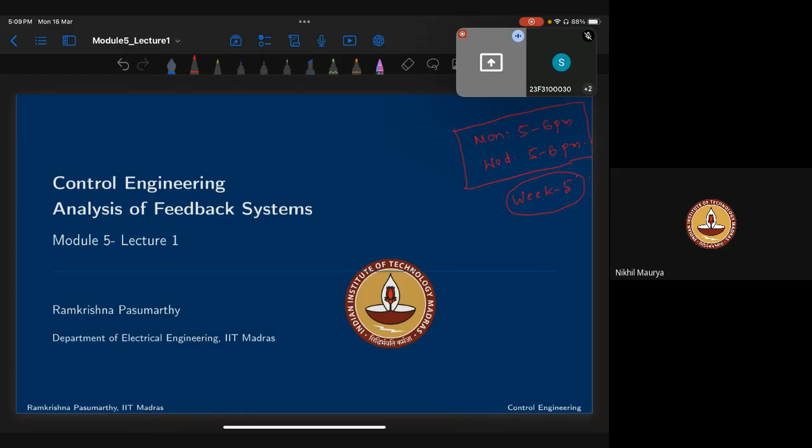So in today's live session, this week, that is week 5 of the course, what I'll do is review the course material today, and coming Wednesday's live session I'll do the problem session. So whatever doubts you have in the lecture material are to be clarified in this live session, you can ask me. I'll quickly go through the course material that the professor has explained in the video, so if you have any quick doubts you can ask within this hour. And at the end of the hour, we'll have a small surprise test also.

Okay, so lecture one covers basically two topics. This lecture introduced the concept of feedback control. It talks about the open loop.

I have one question. In both Monday and Wednesday, we have a surprise test? Both days or only one day? We'll have a surprise test on every day, both sessions. So assume that the surprise test will be on the material which we cover on that day itself, that's why we conduct the test at the end of this live session. Okay sir, okay.

Okay sir, so basically this lecture covers the concept of feedback control, which covers open loop as well as closed loop. So if you see this, when you design the controller for any system, in general these are the four concepts which we see throughout the control system course: stability, tracking, regulation, and sensitivity. We'll see these in the next four lectures, in this quick review.

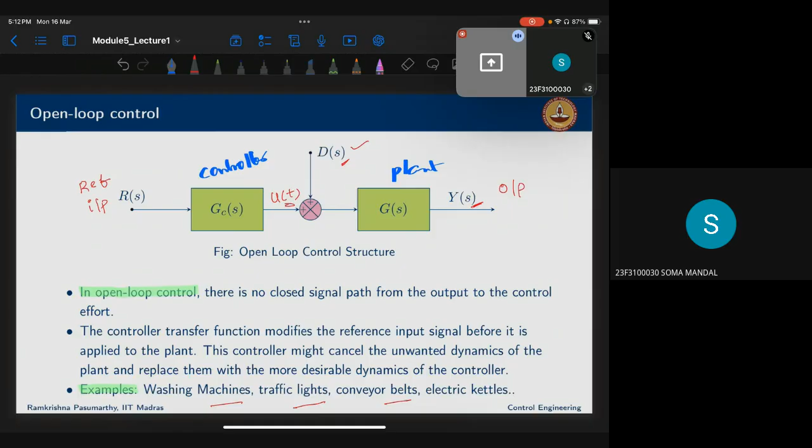Suppose here you see this output, how do we calculate that? We multiply the controller with the reference, and that will be added with disturbance, then multiplied with the plant transfer function to get this final output. So the error will be calculated as the reference input minus the actual output we get, so this is the expression.

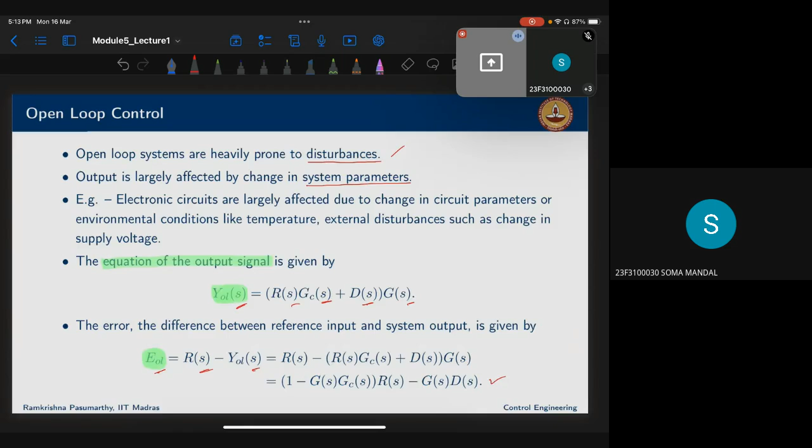So for example, here is the same example the professor has explained throughout this entire week. This example deals with a thermal control system, where the thermal control system has this plant transfer function. Here the goal is to design the controller.

So we wanted to track this reference input R of t, which is a kind of ramp signal having this slope for a duration of 30 seconds, and steady state value of 300 degrees Celsius. Generally what we do is, suppose you wanted to get 300 degrees Celsius, so you multiply with 0.3 and apply the final value theorem, where s tends to 0. So your expectation is 1000 multiplied by 0.3 means you'll get 300 degrees Celsius. That is the ideal case.

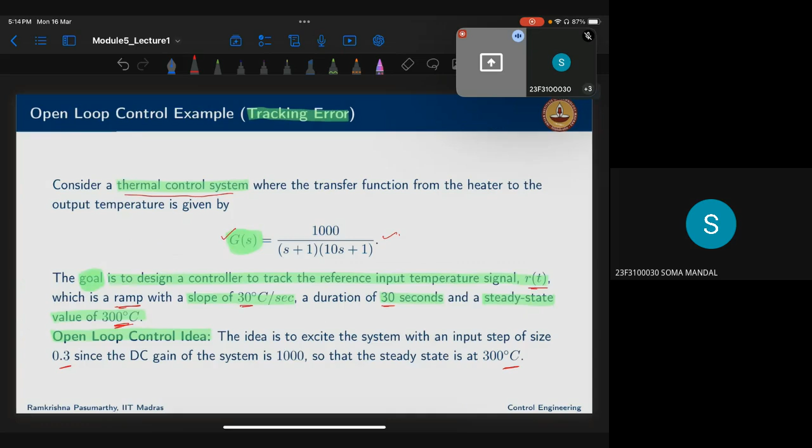So here if you see the R of t reference, the temperature you wanted to track, from 0 to 30 it is having a slope of 30 degrees Celsius, and from 30 to 50 it is maintaining 300. That is your reference signal which you want your thermal control system, defined by this G of s, to track. Now suppose if you apply that with 0.3, so usually if there is no disturbance, what would happen?

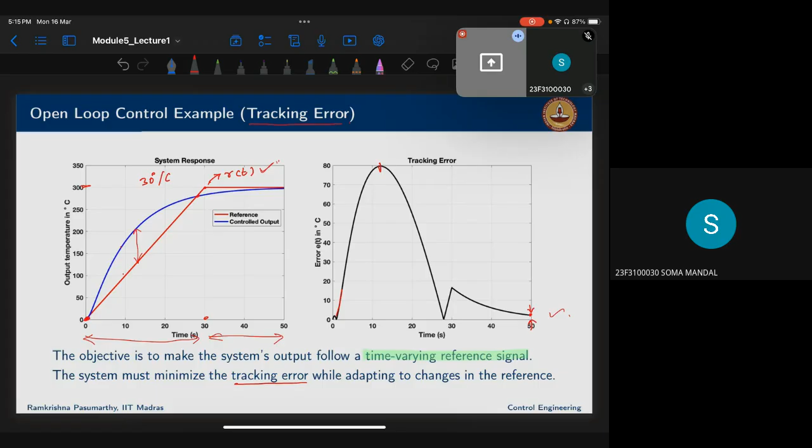The signal will go like this blue curve, and finally it has to match this. So at any point of time, if you see this error, somewhere it becomes 0. So this is the error signal, which we call the tracking error. So that we are dealing with is the first control system aspect, that is the tracking. So tracking in this sense, you have a reference signal R of t to track. That is your aim, so you have to design the controller to track that R of t. So this is the tracking problem.

Then the regulation problem is that you want your system output to track a reference value. For example, here the reference value in this case is 1. So you want your system to regulate to that value, to reach that value and maintain its output value as 1. So we call this the problem of regulation. So tracking and regulation are both different. Tracking, R of t could be a varying function, whereas in regulation, here the R of t is fixed, the fixed value is 1.

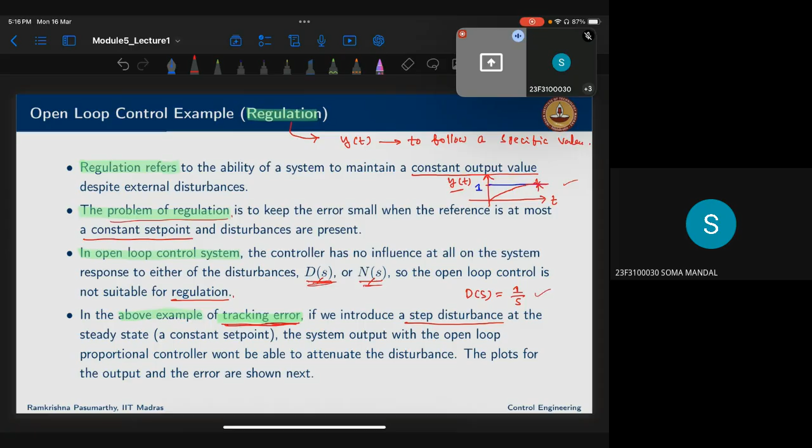Here the basic issue is that if there are no disturbances or noise, your open loop control system will work fine. Suppose if you are getting some kind of disturbance, let's say the disturbance value is 1 in Laplace transform, that is 1 by s. So what would happen if disturbance is also added to the regulation? So you wanted your system to reach a value of 300, that is our problem. But due to the disturbance added, this pink curve you can see, instead of tracking exactly 300, you are getting a deviation of this much value.

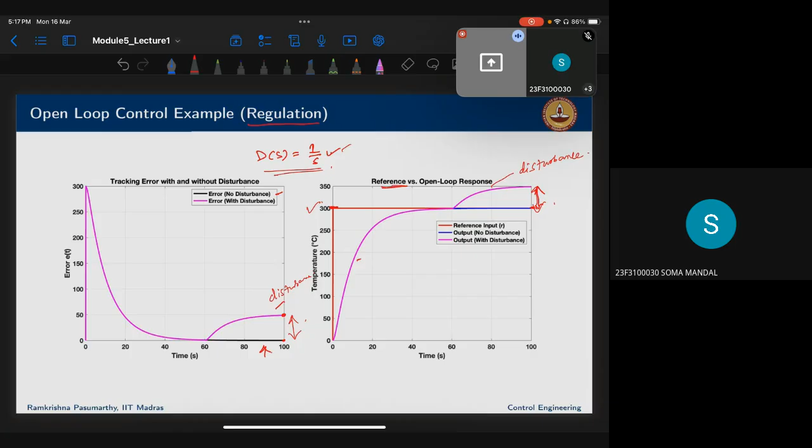So the open loop systems are majorly prone to disturbance values, that is the main disadvantage. So this is the regulation, whereas you could see this much error exists in the output. So this is the problem with open loop control systems, particularly when the disturbance is added.

So the third problem is stability. We have read previously about the stability problem. So as you see, this is the open loop control problem, where we have R of s, the controller transfer function, the system transfer function, and we have the output. So what is basically the overall transfer function? It is multiplication of those two transfer functions, G of s multiplied by Gc of s. Now usually what we do to check the stability, what we have learned previously.

We equate the denominator to 0, which gives us the roots. We call them the poles. So then when can we say that the system is stable? We take this S plane, and if all the poles exist in the LHP, the left hand side of this J omega axis in the S plane, then we say that the system is stable. Is that correct? Yes, that is the stability definition. So that is how we do it.

When your system is affected with disturbances, there is a possibility that your poles may shift. In the previous case, you are adding a disturbance of 1 by s, which means you are injecting a pole at s equals 0. This pole may not be on the left hand side; instead it will be at the origin, and that creates the problem. So open loop systems may not be stable all the time because of these disturbances.

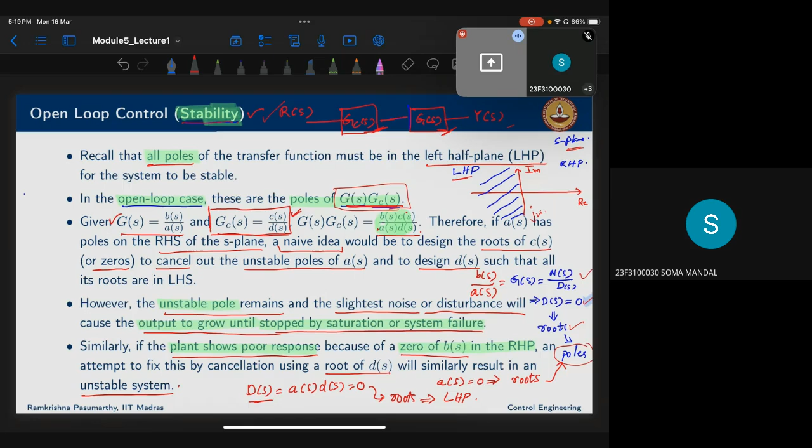This is the third aspect of control system stability. The next is sensitivity. You have your plant with transfer function g, having gain g at a particular frequency. When you do this operation, sometimes the plant transfer function may change by a slight variation delta G. In the open loop structure, you find the transfer function: Y by r is nothing but gc multiplied by g. Let us call that the overall transfer function L.

The question is, what if there is a change in the gain of the system? What happens to this L? This L is without the change in the gain, so delta L is with the change in gain. Now sensitivity is defined by this formula: the fractional change of L defined with respect to the fractional change in G, that is, delta L by L divided by delta G by G. This is the change we expect in the fractional change in L due to the fractional change in G. Generally we define sensitivity in this way.

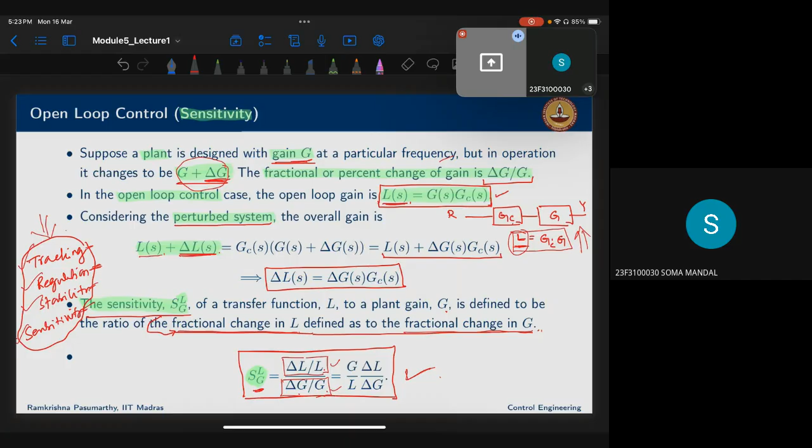So this is about the open loop system. Now in the closed loop system, along with this structure we already have in the open loop system, we are adding something called a sensor connection, which we call feedback. In feedback, we take the output connection and connect it to a sensor which will measure the output value, then connect it back here. Now, apart from compared to the open loop system, disturbance is the extra term we have added. Because we are taking feedback, and feedback is connected majorly with sensors, sensors are prone to noise - all sensor values may be noisy. That's why we are adding this noise term also. Basically, from output to the reference input, we call that feedback control. Is this clear? Any query?

So feedback control. Now if you see here, we have three inputs to the system: reference input, disturbance input, and noise input. Using the superposition theorem, when you give reference input, you can make D of s and N of s zero. So you calculate the first term, that is nothing but Y by R. Similarly, for the other two as well.

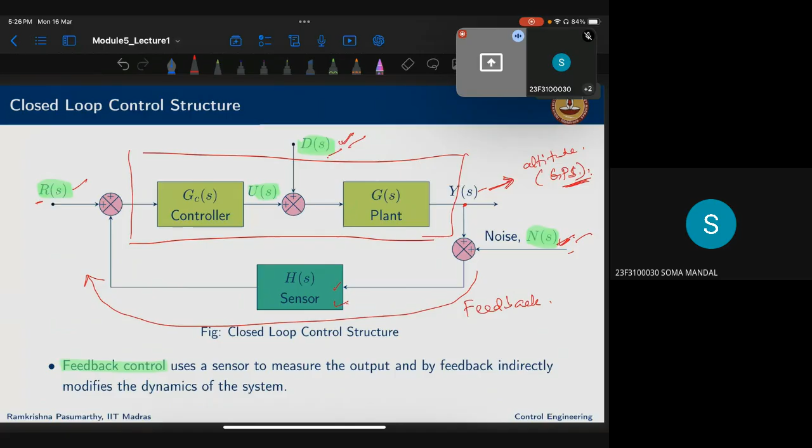Suppose, for example, you are developing the controller for a satellite. The output might be the height of the satellite, the altitude. To measure the altitude, you use the GPS. The GPS measurements may not be very accurate, because of the electronic components in the GPS there could be heavy noise included. So that is one example.

Another example is suppose you are developing the closed loop controller for an autonomous car. This is the distance from the front vehicle, which you will be measuring using a camera. Sometimes you may use a less FPS camera, sometimes a better FPS camera with a tracking algorithm, so measurements may be noisy. Camera view may not be good during daytime and nighttime, etc. That's why we are adding the noise.

Now, for every input R of s and D of s, you can find these expressions. Once you have that, you can calculate U of s, which is nothing but the input you give right after the controller, corresponding to each input. You can do the calculations to get these terms. This you are doing by using the superposition theorem.

Now you can get the tracking error. You have your reference input which we wanted to reach, and you are getting the closed loop output at this point. Taking the feedback here, this is nothing but Y closed loop. This will be your E of s. Error is nothing but R minus Y. That's what we are trying to calculate here.

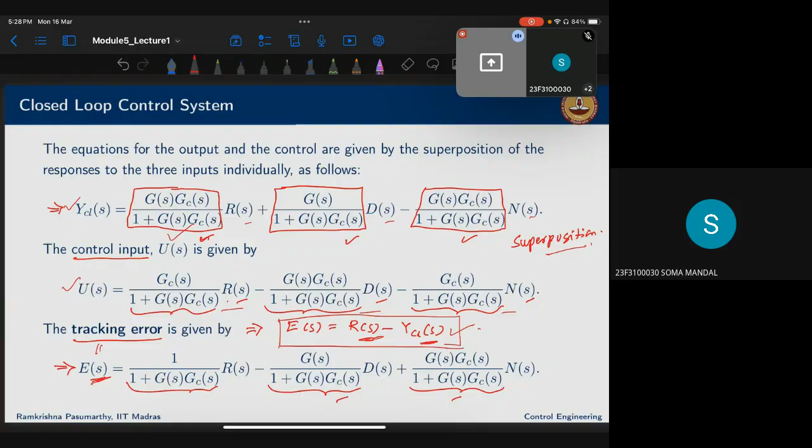R minus Y. So you have your Y already, you have your R, so you will calculate the E of s. This error we call the tracking error. Now suppose you make the other two terms zero, noise and disturbance. If you do that, the tracking error has some change, delta E of s, so you can find the delta E of s expression. You can do those calculations and find the change in the tracking error. Here you could see this expression.

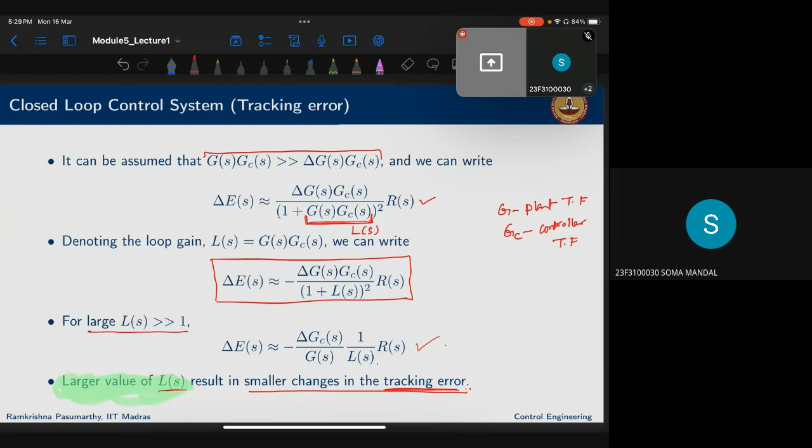For large value of L of s, which is nothing but the open loop control system gain, the changes in the tracking error will be very low. So what we are doing here is, for the same closed loop control system, we are trying to define and check those four problems: tracking, regulation, stability, and sensitivity. Here in the closed loop control system, we are checking what advantage the feedback is giving.

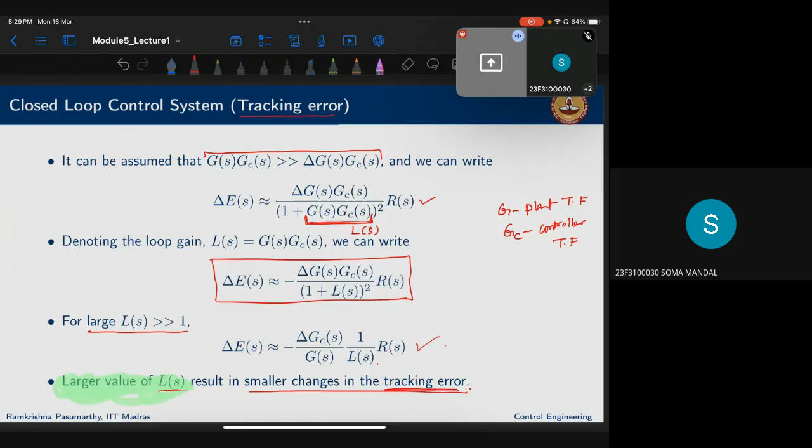You can see this same example. The example says we have this thermal control system, defined with this plant transfer function. You wanted to track this reference input R of t having a slope of 30 degrees per second for 30 seconds, and then it is stable after that. Here your control strategy is you wanted to minimize the error between the reference and the actual output. Let us say you are using this controller; the GC expression is something like this. Now along with this, you are using the feedback.

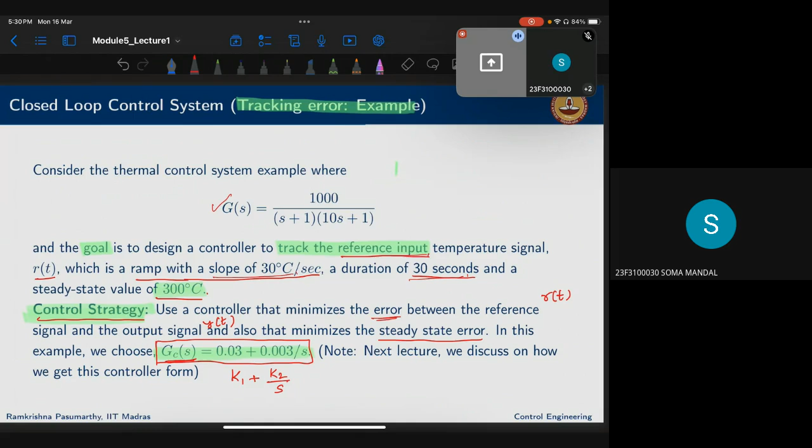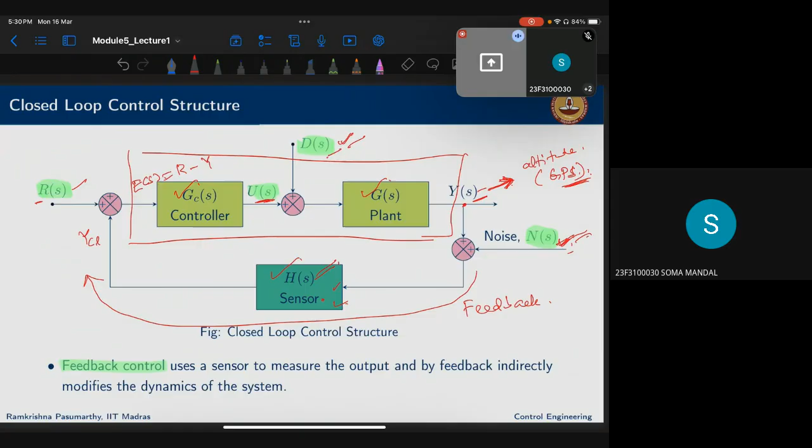It means that the GC expression is what you will use here. G of S is this, so this is the feedback. So whatever transfer function a particular sensor we use here, that H of S we will use. If you substitute them, now you can see this response.

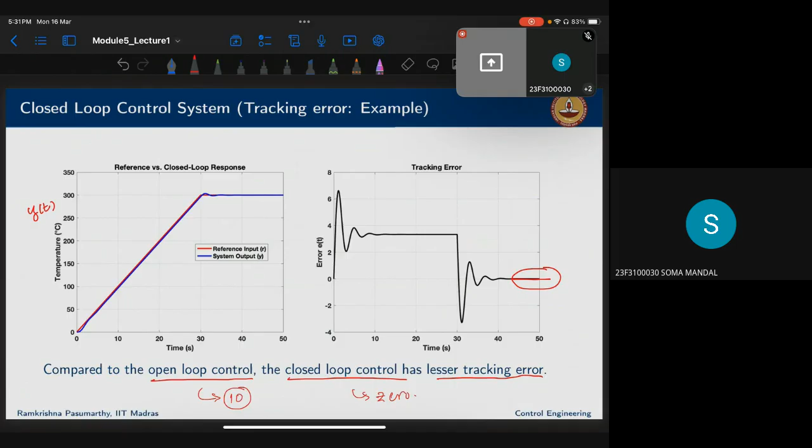Previously, what we have seen is there are a lot of steady state errors existed. It means that at the end we have seen some error existed. Whereas here you could see the error is almost zero, the tracking error is very very less. Whereas in the open loop control system the tracking error is almost 10, here it is almost zero. This is all due to the feedback. So this is for tracking with closed loop system.

So in the sensitivity, similarly, we define it in a similar way. So you have this expression for closed loop control system. Then you define L, the closed loop gain. So now you are asking, what if there is a change in G, that is nothing but delta G? What kind of change you will get in the closed loop transfer function? This is the expression.

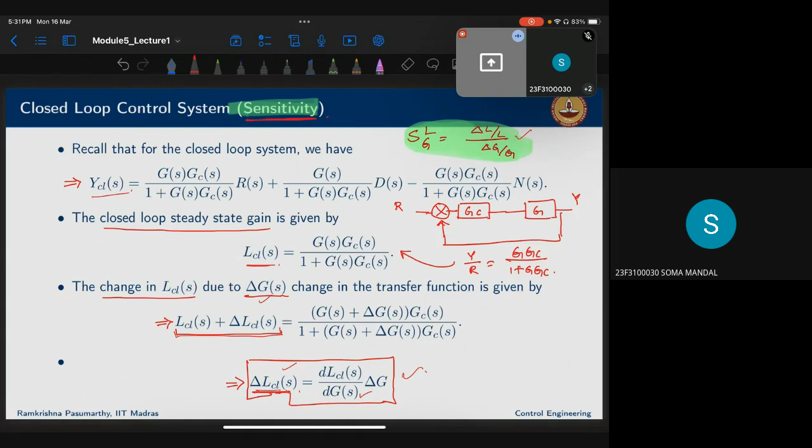So now you're going to find this. If there is a change in G, what is the change you are getting in the closed loop transfer function? This is the general formula that we have seen in the open loop case also. This is the sensitivity. Here you can see, this is with the controller, this is the final thing. So here what it says is, they are less sensitive to the variations in the plant, when you compare with the open loop gain.

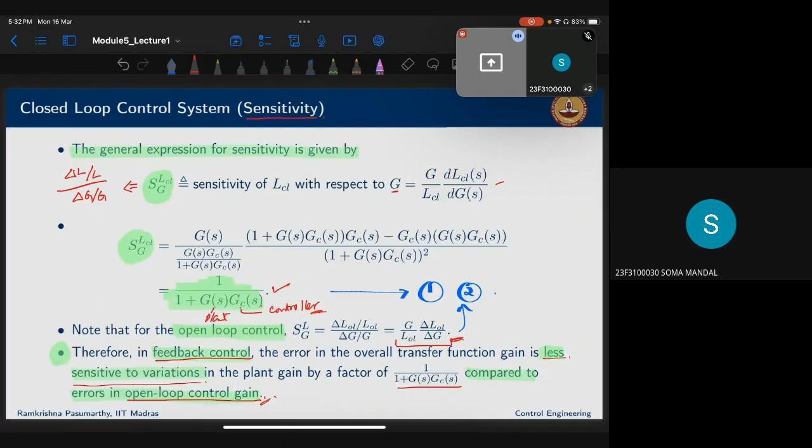Next, for stability, always remember this derivation. I'll try to do this derivation once again. Here you could see this is the closed loop system. Here your intention with closed loop system is you have reference output Y, the sensor H, the controller GC, and the plant G. So now here you could see, what is E?

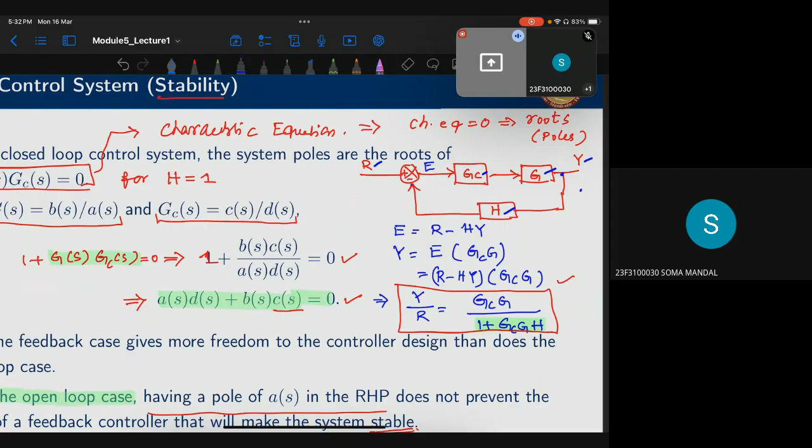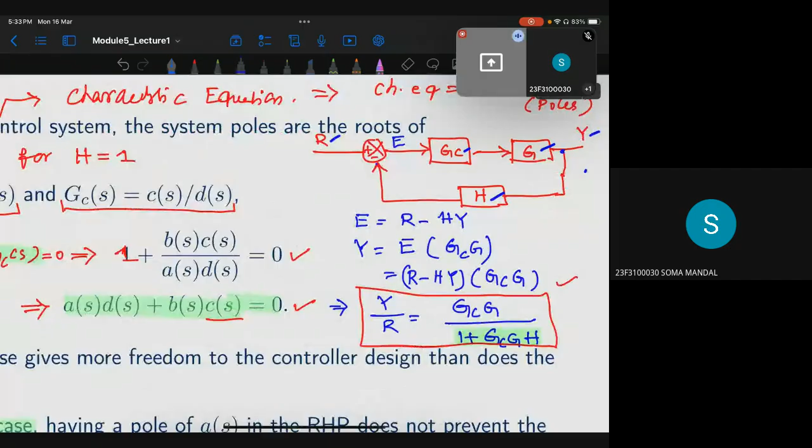E is nothing but R minus... so here what we are trying to do is, the error is nothing but reference R minus Y multiplied by H. Here you are getting this, so this is the first expression.

Our intention here is to find the transfer function Y by R, that is the output by input. So now from here we could write Y is equal to E multiplied by GC multiplied by G. What basically is E? E is R minus HY. So GC multiplied G, from here you could take the R out, so you'll get this final expression. Is there any doubt in this?

No sir. So this is the general method of finding the transfer function for closed loop system. Finding transfer function for any closed loop system, in this way we will find it.

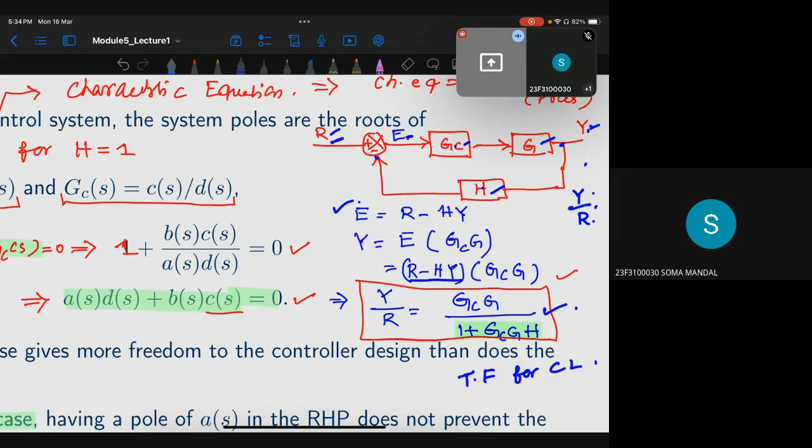Okay, so now if you look for the stability, here you could see this is the plant transfer function, this is the controller transfer function. When you substitute them here you are getting this term 1 plus GCGH. So basically, how do we find the poles? We find the poles by equating that to zero. This is the expression you are getting. The denominator will be 0, yes.

So the denominator is zero. Here you could choose your controller C of S and D of S in such a way that you can make your poles on the left side of the j omega axis, so that your system becomes stable. That is the advantage with the closed loop system, it will give you more freedom. So that is with closed loop system.

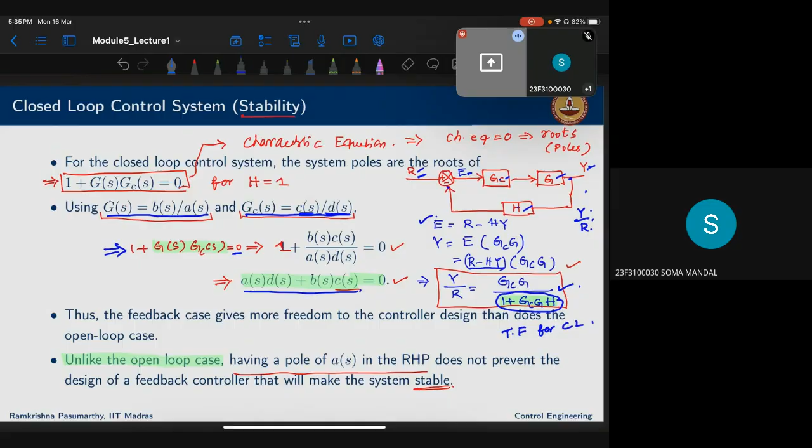So if you fix this G of S, then increase the loop gain in this case, the disturbance will decrease. Disturbance decreasing means you will get this error reducing. Basically, the disturbance signal you will get in low frequencies, whereas noise you'll get in high frequencies. This is the difference between these two.

Okay, so here the closed loop system advantage is that by properly choosing your GC, you can reject the disturbances at lower frequencies. That is the advantage of closed loop systems.

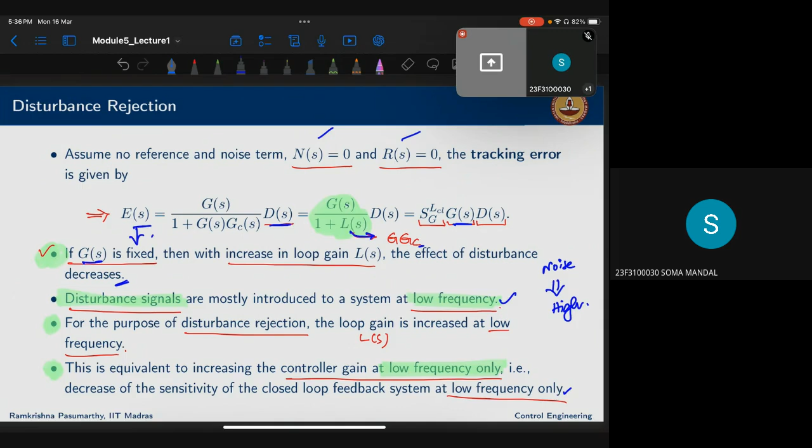Similarly, for noise, you can take the noise as input and make D of S and R of S as zeros. You can do the same thing with the error.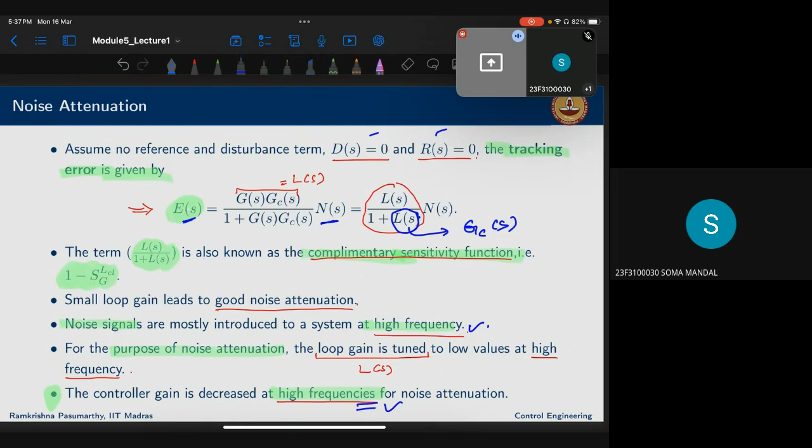Basically the noise signals will be generated at the high frequencies. Here also, by properly varying this L of S, which you can vary by varying the controller, you can do the attenuation of the noise at the higher frequencies. So this is the advantage you get with the closed loop system.

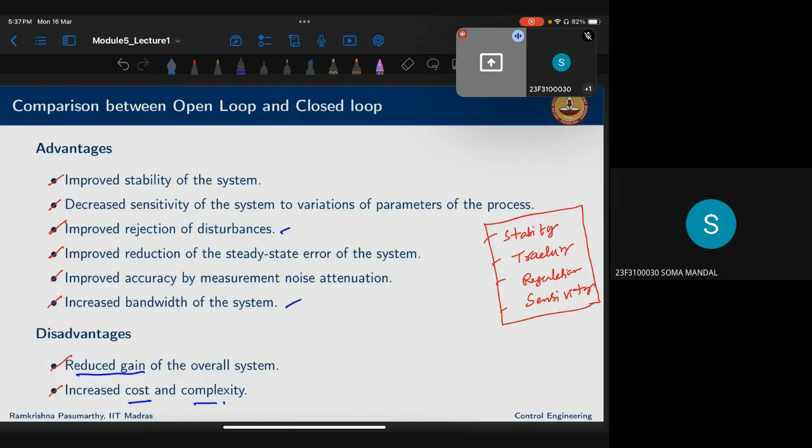So finally, these are the advantages of closed loop over open loop. What are the different advantages? You'll get improved stability, sensitivity decrement, rejection of disturbances, attenuation of noise, and it could also increase the bandwidth. The only issue with the closed loop system is that your system gain might decrease, and since you are adding the feedback loop and doing many calculations, both the cost and the complexity increase. So these are the main advantages with the closed loop.

Are there any queries between open loop to closed loop? No, sir.

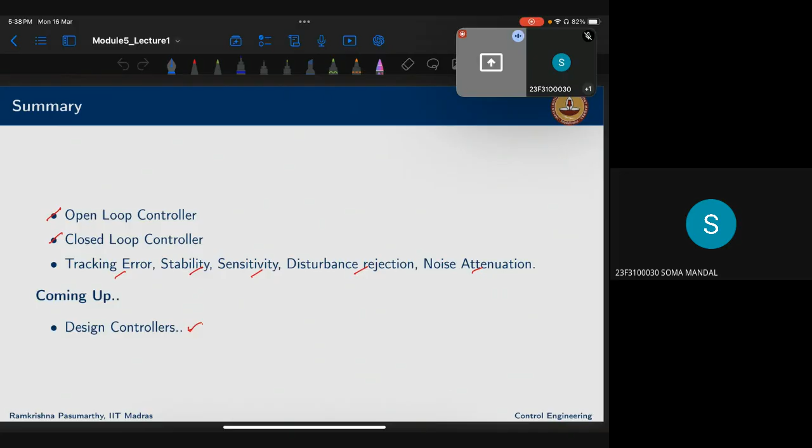Okay, so next we will see this, a proportional controller.

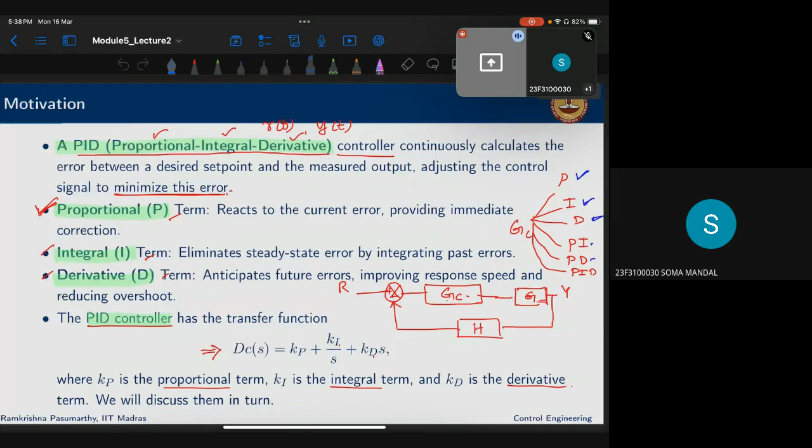So basically, if you see this, this is the closed loop system we have. In the closed loop system, we have reference R, Y actual output, feedback, the controller gain, and the plant transfer function. So here the question is, what is the controller gain which you choose?

In the control system, you have different options to choose - various controllers: the proportional controller, integral controller, derivative controller. Put together all, we have the PID controller. So for every controller, the system behaves differently.

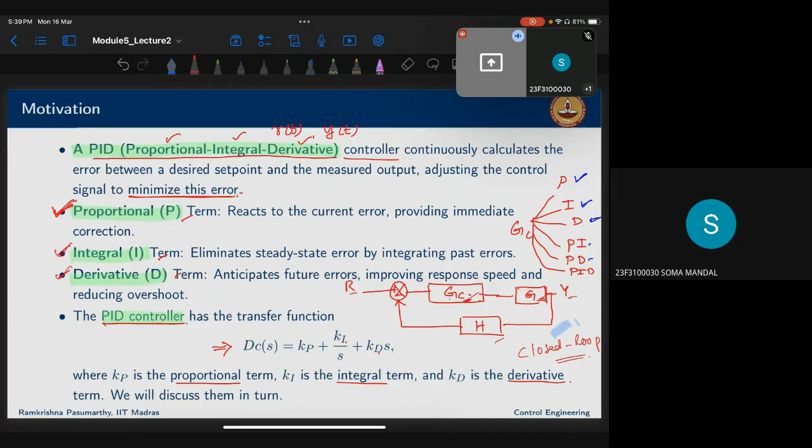So you start with the proportional controller. Proportional controller in the sense, the GC - you'll be adding just a number only, like some number KP. There is no 's' term over there, just some number.

So then you measure your output here, and the output will be fed back. Then you get your error, R minus - error is nothing but R of t minus y of t. So that error you will get, and that will be multiplied with KP. You will get your u of t, KP multiplied, u of t.

So that you pass on to this summation, and the disturbance will be added. That signal you will apply to the plant, and you'll get your output.

So then you will find, since you want your output to follow this reference signal, you wanted to see this error e of t equal to r of t minus y of t. You wanted to measure this in terms of steady state. If they both are exactly same, y of t and r of t, you should get your error as zero - the tracking error should be zero.

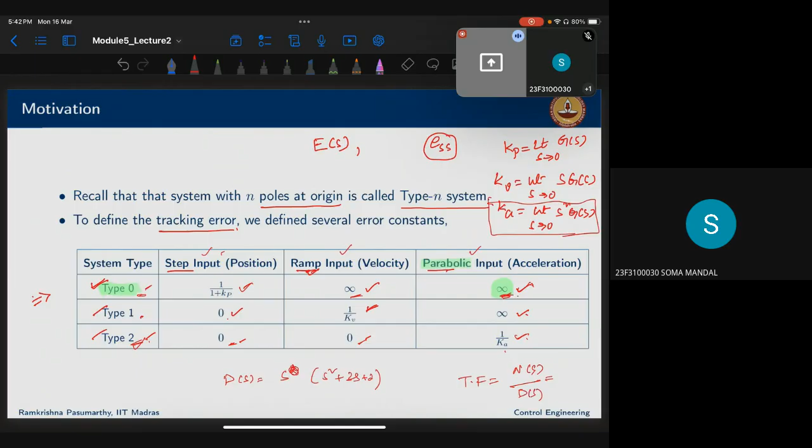Similarly, if your system is type 2, the steady state error will be 0 for the step input, and for ramp also 0. For parabolic, you find the steady state error using this, where Ka is this expression: limit s tending to 0, s square G of s. You might have already done this in the time domain systems, so based upon that you can calculate it.

So the basic point we need to note down is, when this GC controller is KP, what happens to this ESS? That's what you wanted to see.

Our intention is that R of t, we wanted to reach 1. But the steady state error, that is E of t equal to R of t minus Y of t, that has to go to 0. But it will go to this expression, 1 by k plus 1. It will not go to 0.

You want your system to reach 1, but your output may reach only here. So it means there is a steady state error of this much, and that expression is 1 by k plus 1. If you do all the calculations, plot the y of t expression.

Take kp equal to some 3, so G of s is some 1 by s plus 1. Do all calculations, take R of s equal to 1 by s, do all calculations and find the y of t expression. You will get that y of t will not reach 1. At time t tending to infinity, it will always stay at some point. This means your proportional controller always injects, always results in some steady state error.

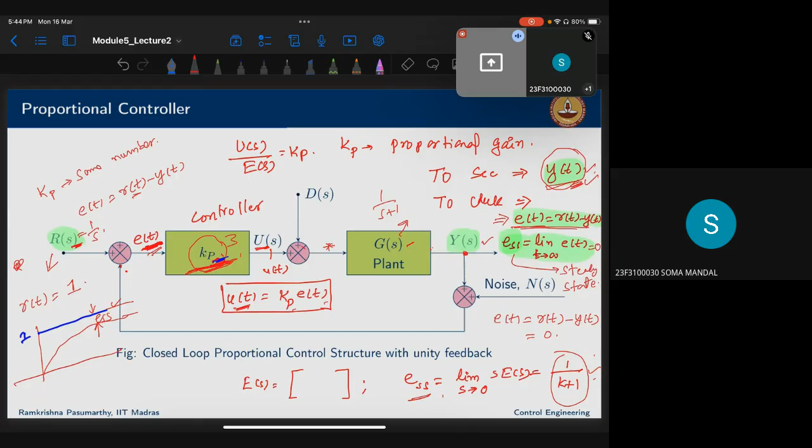That's the main point. Your proportional controller will always result in 1 by k plus 1. You are supposed to reach 1, but your steady state error will produce 1 by k plus 1. That's the major point.

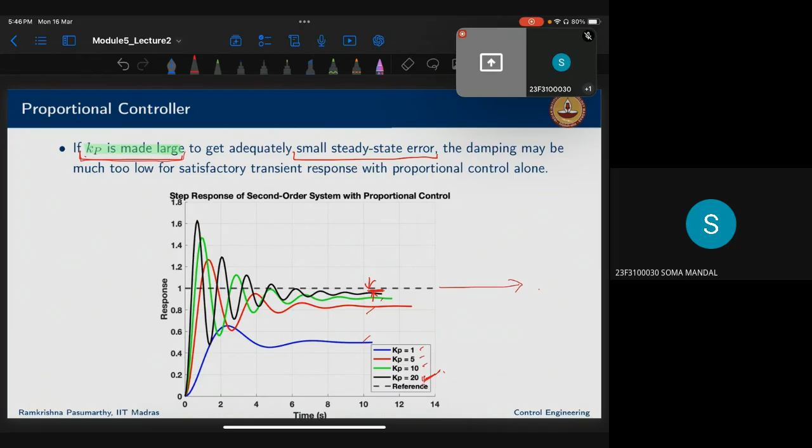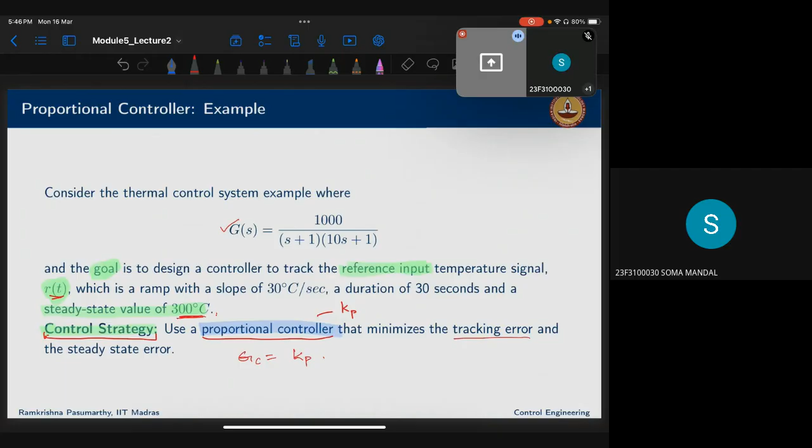Now coming back to the same example, you wanted to reach 300 degrees Celsius, using this G of S. So now GC, if you use KP, what it does is basically try to reduce the tracking error. It will try to reach that 300 degrees Celsius, but it will incur some steady state error at the end.

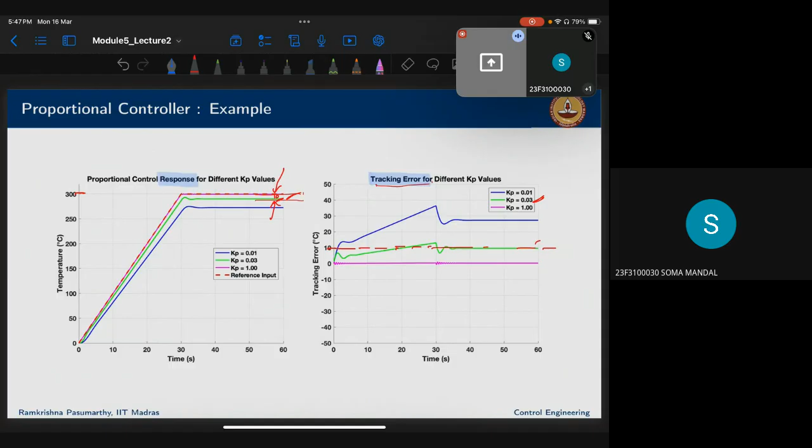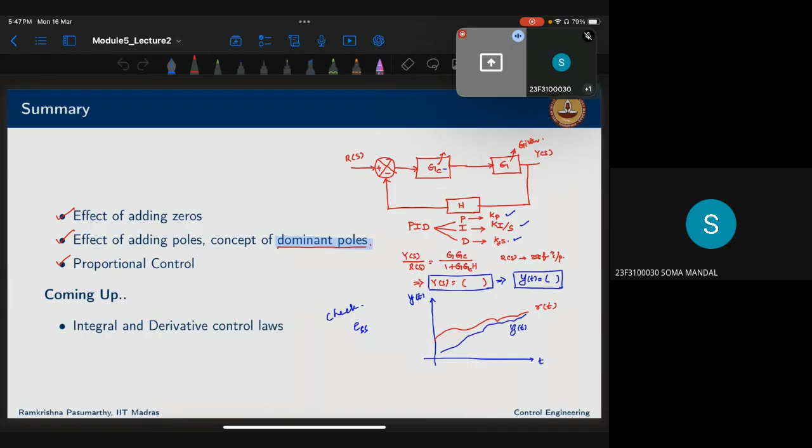You can see here it is incurring, resulting a steady state error of 10. The 300 is this line, and actual is this line. So it will reduce the tracking error, but still you have this steady state error, ESS. That's the problem with the proportional controller. So always you have this error. What you can do is add these poles to change the behavior, which we also call the dominant poles. That is the proportional controller.

Next, we will see what is the integral and derivative controllers.

So integral controller, basically I said the proportional controller is resulting in steady state error ESS, resulting a steady state error ESS KP.

So in integral controller, what we do is this GC of S, we replace with the integral of e. That means here, output is y, reference is r, and e is nothing but r minus y. This integral controller takes the integral of e up to that time, meaning it adds all the previous errors till time t.

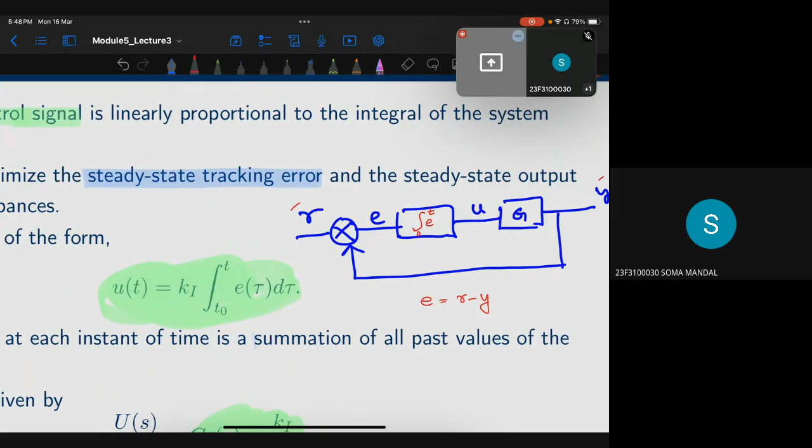Is this clear? So that is the integral controller. U of t is nothing but KI, some integral constant, multiplied by the integral from initial time to t of e of t. So basically the integral is necessary.

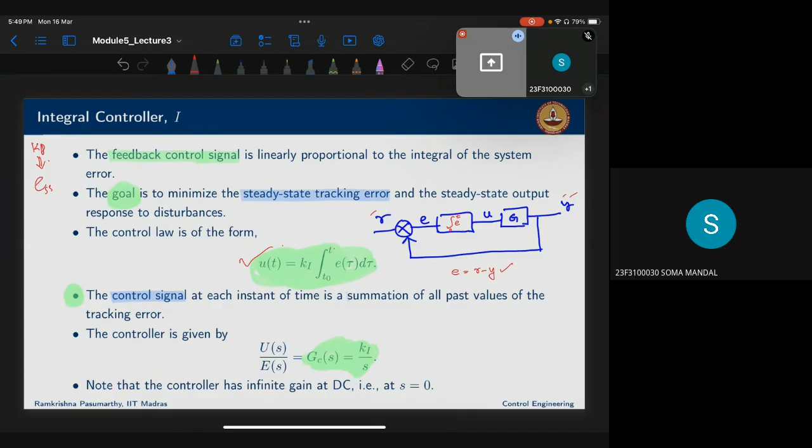Why? Because what is our intention here? We wanted to make this error zero. Let us say at time t, if y and r are the same, what will happen to the error? If y at time t equals r, then e becomes zero. But what is u?

U is nothing but the error itself, if we use just e. So if u is equal to e, and the error becomes zero, what does it mean? U also becomes zero.

So when R and Y are the same, you get error as zero. If error is zero, U also zero. If U is zero, the input given to the plant is also zero. If plant input is zero, Y also becomes zero. It has no meaning. That's why instead of keeping E, we take the integral of E.

We take the integral of e, so the previous error will be added all the time. What do you mean by integral basically? If you have any curve, let us say this is t, and this is f of t, what is the integral of f of t? That's the area covered by this curve. That never becomes zero. Maybe your error at a particular time is zero, but the error from 0 to TF is not zero, always. That is nothing but the area.

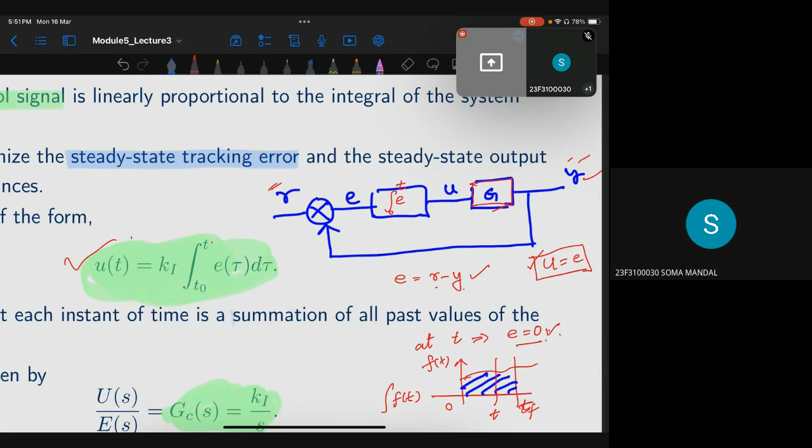So that's why instead of direct error, we take the integral here. That's the importance of this term. Is that clear? Now when you take the Laplace transform, the integral of e of t gives 1 by s.

This will be your controller transfer function, GC of S. Now, when you include this and do the calculations, finally find the expression for y of t and r of t, you get e of t, which is nothing but r of t minus y of t. Then find E of S applying the transfer function. Then find ESS, which is nothing but the Laplace limit as s tends to 0 of s times E of s.

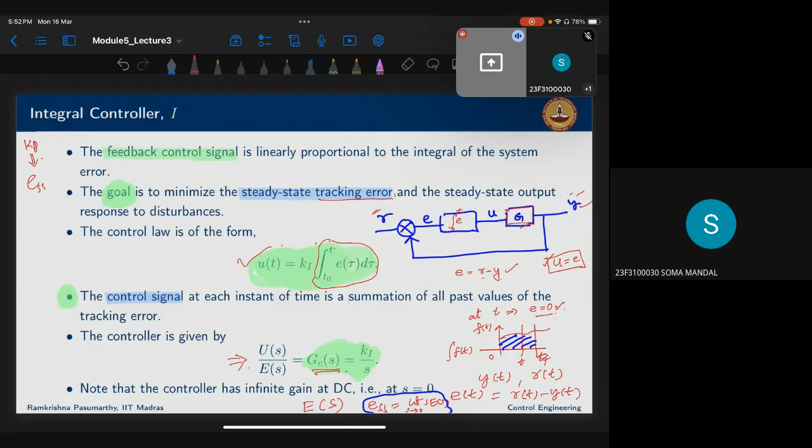So what is this basically? This is due to the final value theorem, finding the steady state error. When you do that, you will get zero error, zero tracking error. Previously using the proportional controller, some tracking error existed. Now this results in zero tracking error. So that's what this expression says.

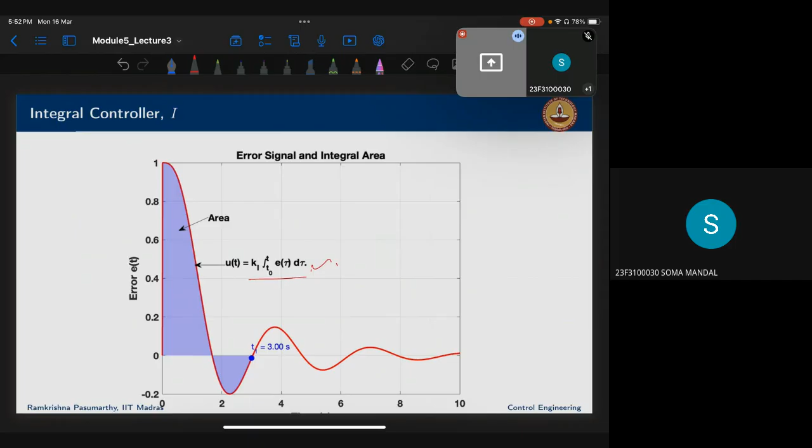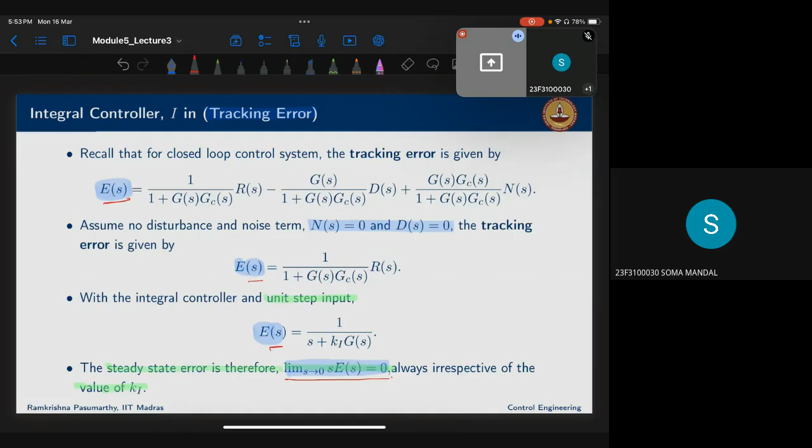So you're applying this overall area. Instead of zero error, you will be using the overall area. Then you are finding the E of S expression, so you take the limit as S tends to zero of S E of S. That will make the total steady state tracking error zero. So that's the advantage with the integral controller.

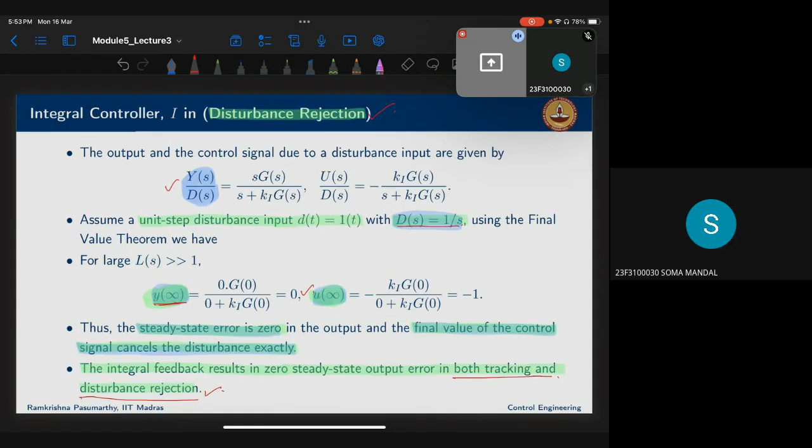So then you could also see this disturbance case. You apply some disturbance and find the transfer function, taking the disturbance as 1 by s. Again, do the same calculations and find y of infinity. You will find that y of infinity is 0, which is the output due to disturbance. It means the integral controller has the ability to reject disturbances completely. It can do both tracking and disturbance rejection perfectly. That is the advantage.

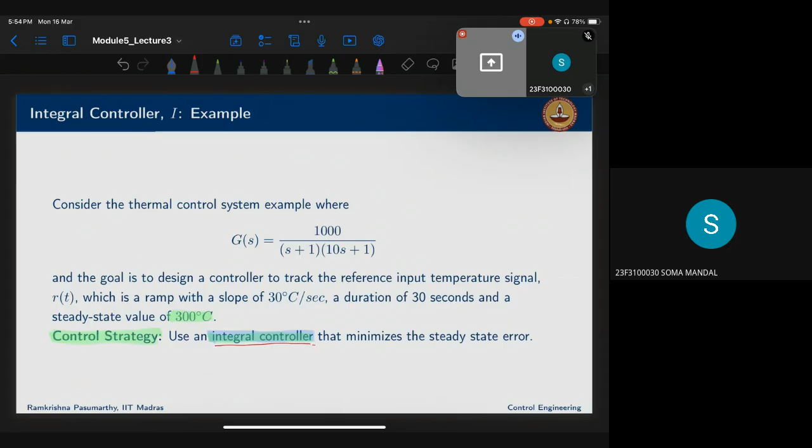That's the advantage. So next we have the derivative controller. In the derivative controller, in place of GC we take the derivative of error, that is E dot of T. If you take the Laplace transform, you get KD multiplied by S.

So the derivative controller will handle that overshoot issue, and also it improves the closed loop stability. So basically that overshoot is defined with something called the transient response. Transient response is nothing but what?

We have two responses: transient and steady state. Transient means, when you get the response in shorter times, starting times, and the response after a long time - these are called transient response, and these are called steady state response. So the integral controller will not handle this transient response properly, whereas the derivative controller will try to reduce this overshoot and provide better transient response.

So transient means when the response is changing with respect to time, and steady state is when the signal is stable. We define this with respect to time. Suppose here you have total 250 seconds. So during starting times when your system is oscillating, till let us say 100 seconds, generally we call that transient. And after that, the system tries to get stabilized after some time. That we call steady state.

So the derivative controller will handle these situations easily. Why? Because here you are taking E dot, which is dE by dt. That is nothing but d by dt of r of t minus y of t, which is r of t dot minus y of t dot. It can handle both how my reference signal is changing and how my output is changing - what is the deviation between these two. So that will be handled by the input due to the derivative signal. That's why we say it is proportional to the rate of change of the system error, and that error depends upon both reference and actual output.

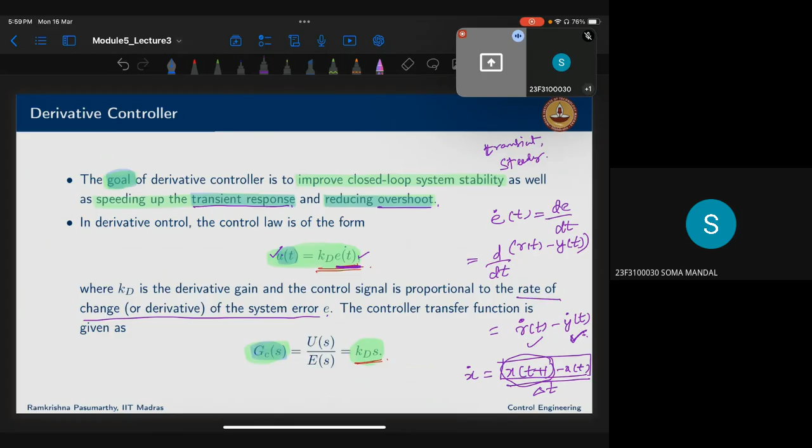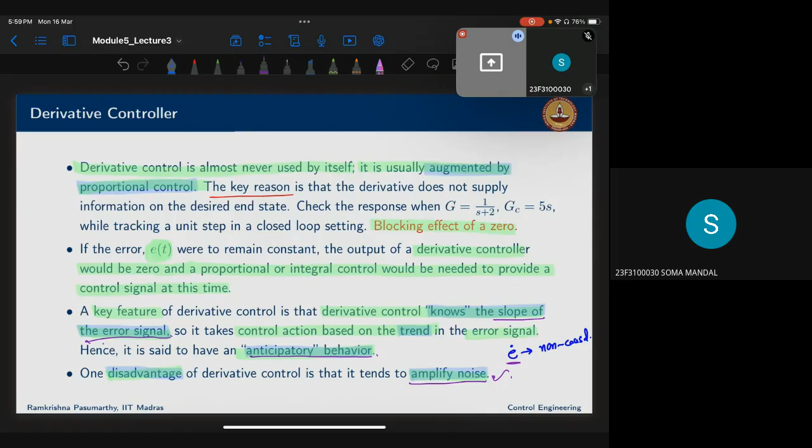So here E dot means it always anticipates what is coming up front, because of this value - what is the error I'm going to get, because we are looking at de of t by dt. So that is the advantage with the derivative controller. It always anticipates the behavior of the system, because by knowing E dot we will know how the slope of the error is changing. So the basic disadvantage is, since you are looking one step ahead, it will always be prone to noise - that is the disadvantage with the derivative controller. But by looking at the anticipatory behavior, it will try to reduce this height, the overshoot.

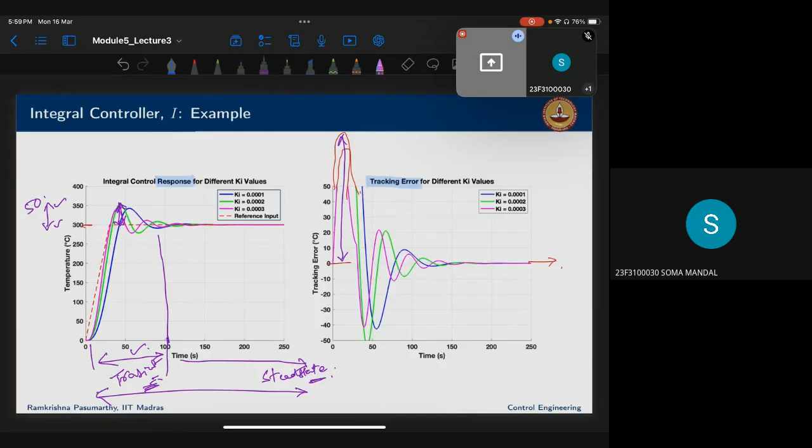It will not make the system reach that height very easily. So that is the advantage with the derivative control.

Now integral controller will completely eliminate the steady state error, but it will increase the overshoot. The derivative term will decrease the overshoot, improve the stability, but it will inject some kind of noise.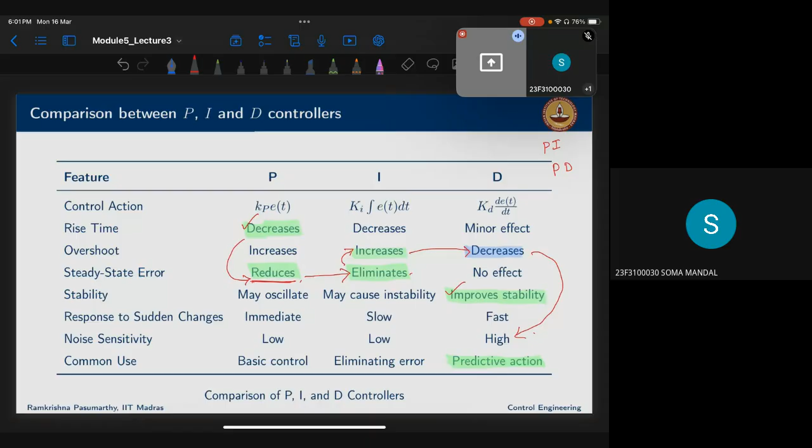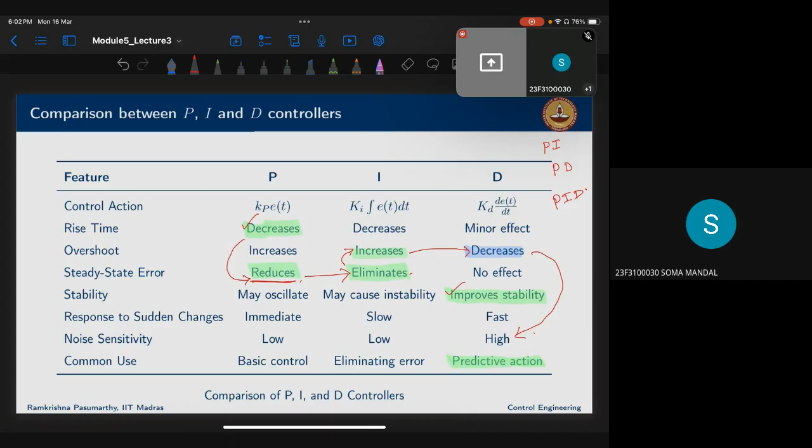You want to reduce the rise time, and you need your transient stability more. When you need all these things, you will also use PID. That is the final controller, something like this.

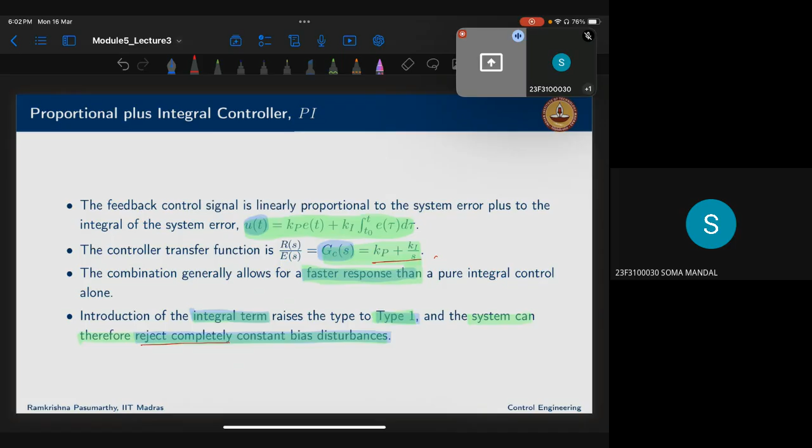First you have the PI controller, which has both the P term and integral term, so you get both advantages. It can reject disturbances and reduce the steady state error. You can see the example here: the steady state error is zero, and the rise time is better.

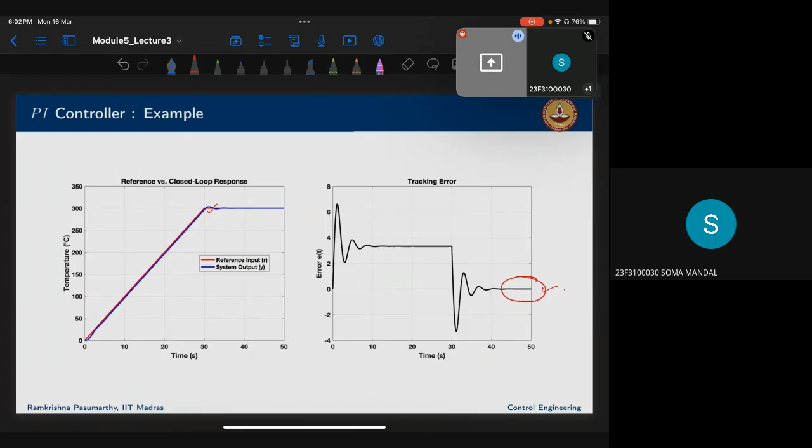Then you can have a PD controller, where you use KP and the derivative term. What it does basically is add a zero, whereas PI adds a pole. Because of this derivative term, the system anticipates how much overshoot is coming up and takes action accordingly, improving the damping of the system to reduce that overshoot.

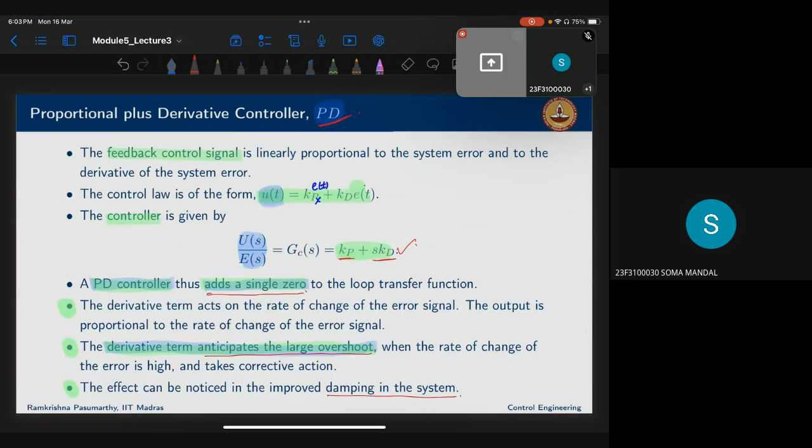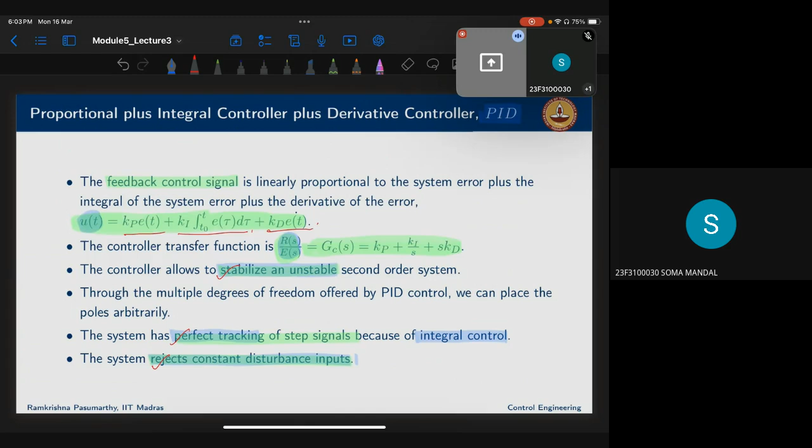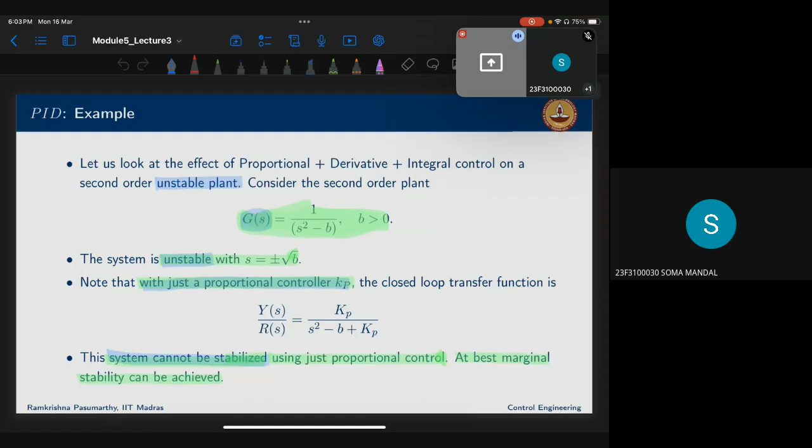So we have these two terms, you can visualize how it is happening. Then you'll have all the advantages: P controller, integral controller, and derivative controller, giving you stability, tracking, disturbance rejection, and improved transient stability. If you want, you can take MATLAB and plot the responses for the same example.

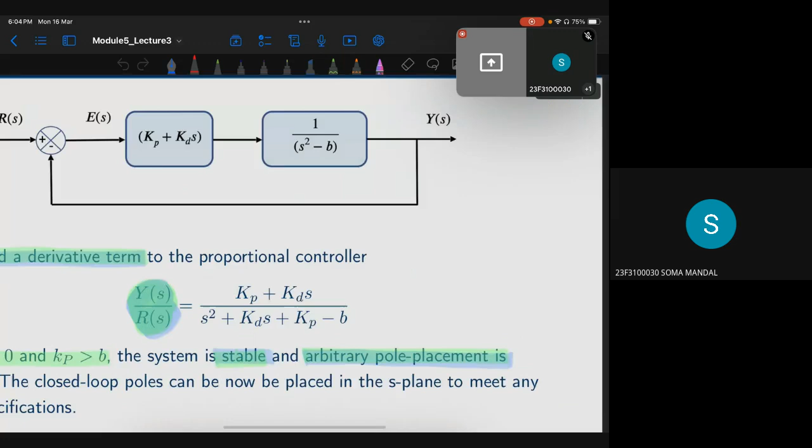I think it is already 6, and I think I gave enough overview. Now it is time for the class test. Let me give you a question, I'm writing the question here.

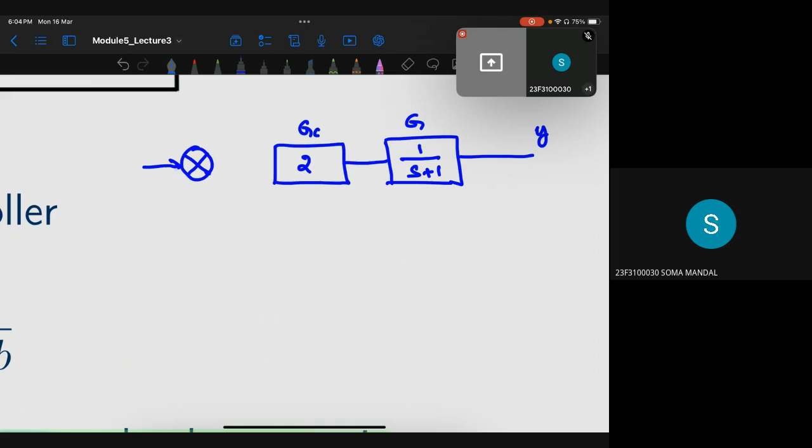So let's say we have a controller GC, and this gain is 1 by S plus 1. This is Y, and this is R, so we have error. Let us say feedback is 1. So this is your problem.

Now tell me the steady state error of this system. We can write the problem: find the error, apply the final value theorem, and tell me the steady state error. You can write it and send me the email.

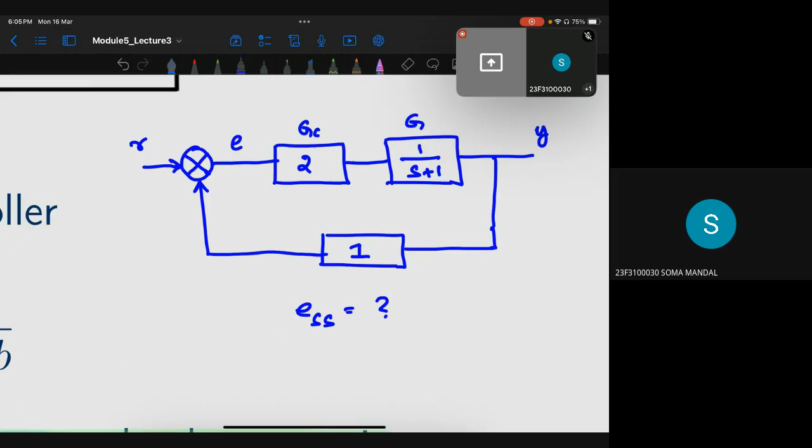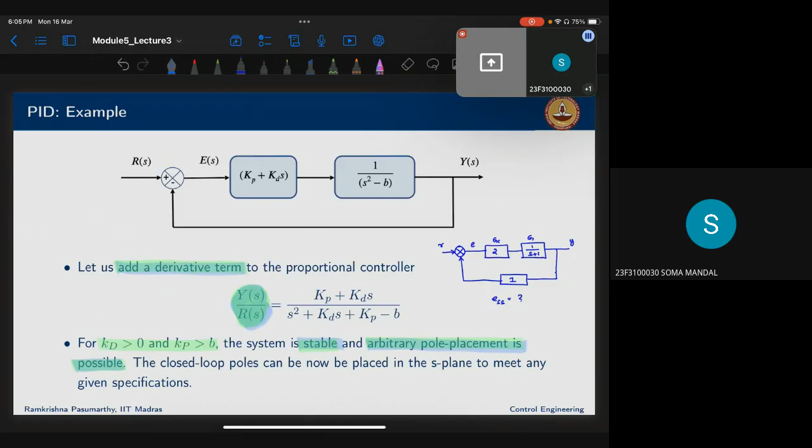Sir, give me 10 minutes to do this. I will draw the circuit, sir. Please zoom the picture.

Sir, we have to find steady state error. Yes, okay, I'm closing this call. You have 10 minutes to send, right now the time is 6, you can send me by 6:15 or 6:20. Okay sir, I will do that problem.